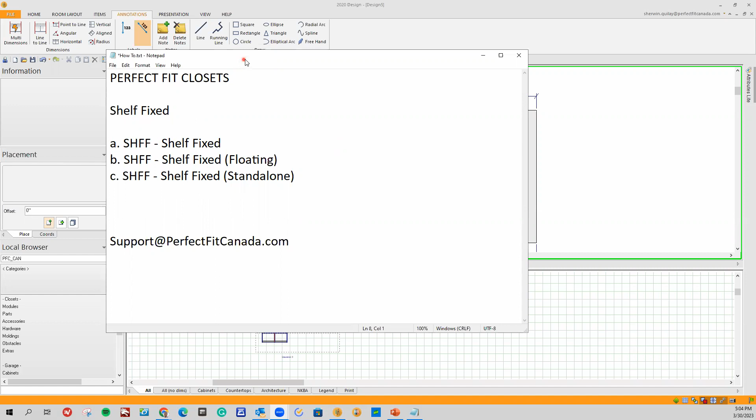I have my 2020 program up, and on the bottom left-hand side, I've got my Perfect Fit Canadian catalog. We also do have an American catalog that's indicated as PFC US.

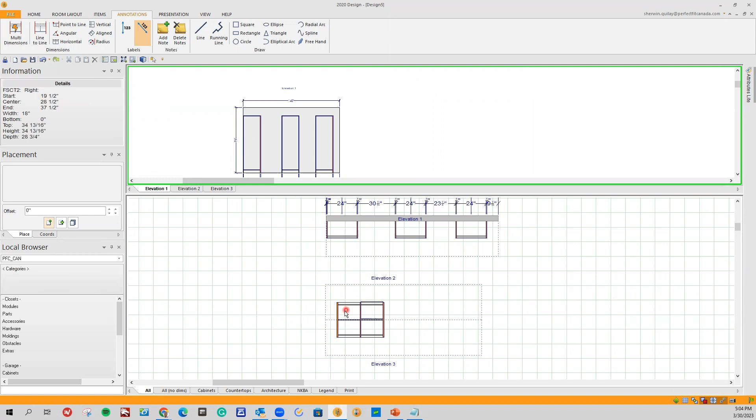My current design has 3 elevations. I've got an elevation with 3 wall modules. I've also got a fictitious wall, and I've got an island module, which we'll be talking about in just a moment. Let's just take a quick peek.

On our elevation 1, I have 3 wall modules, 3 tall modules. All of them are 24 inches wide. I'm going to go ahead and choose a couple of different areas and let you know from the basics all the way down to advanced.

I'm going to double click our categories, parts, and in our parts we've got 5 subsections: panels, shelves, drawers, doors, floating shelves, and parts below. In our subcategory shelves, I'm going to double click our shelves.

The first section has shelf fixed floating and shelf fixed standalone, similar to exactly what we're going to be talking about.

Everything in navy blue is a shelf fixed. Shelf fixed comes with 4 to 6 cam holes. At the very top of these shelves and the very bottom, we've got 4 holes pre-drilled, 2 on the left, 2 on the right. If it's greater than a certain depth, we'll add extra holes to add a total of 6.

For 14-inch deep sections, we've got 4 cams. So these are our fixed shelves, and these stay put. They don't move. Once you've locked them into place, they stay put.

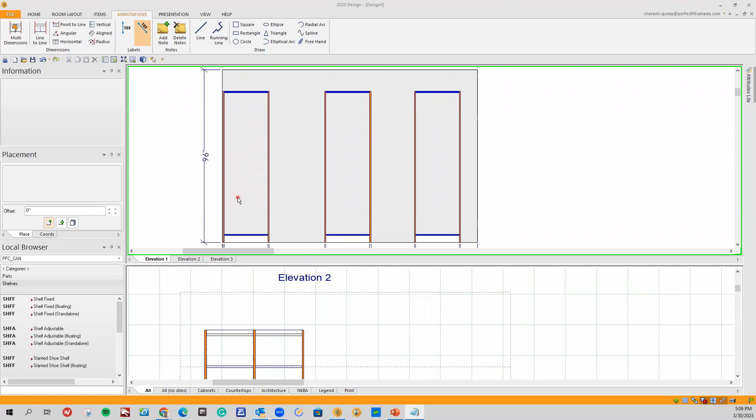For our tall module sections, because we've got long panels here, we want to add a 3rd fixed shelf. So all I'm going to do, since I've got modules in place, is left-click shelf fixed and drag it into the elevation. As soon as I see my magnet, I can let go.

I can let go at any time as long as I see my magnet. I'll drop it here as an example, and I can now move it to where it needs to go. We can go ahead and add the shelf fixed.

Typically you'd like to add it in the middle, but anywhere between the top mark or near the bottom mark will suffice. This will prevent the actual panels from bowing even further. If I put the shelf fixed in the middle, this can't really bow as well. If I add it anywhere here, I still have enough space to prevent the bowing from happening.

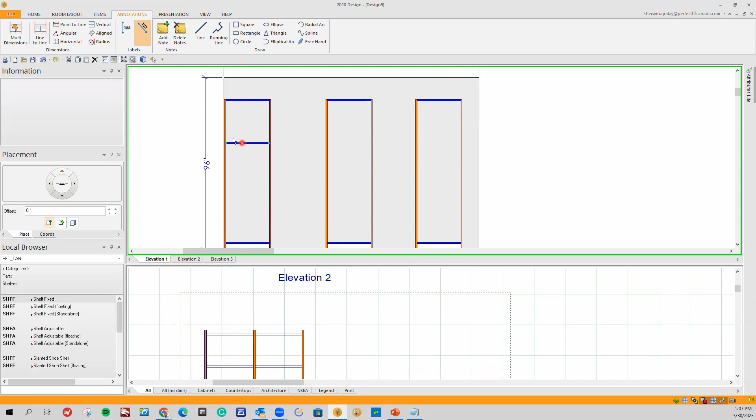So again, I can just grab a shelf fixed and drop it in, just like so. Now let's go ahead and delete these - that's pretty simple and basic. I like to use 3 fixed shelves per tall module when possible.

The 3 fixed shelves for tall modules. Now let's go ahead and delete these, and let's go ahead now and try our wall modules.

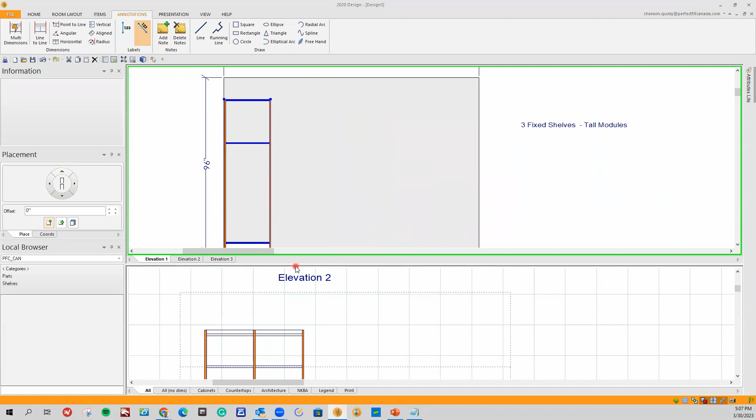So now I've got a blank space, and let's add in some wall modules. I'm going to go to my categories, modules, wall module, and drag and drop my wall module. Once I see my magnet, I'll let go of my mouse.

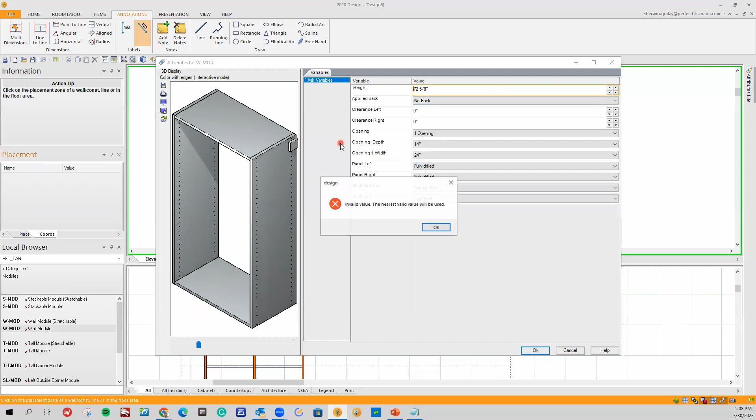A new dialog box will appear. I'll right click on the illustration. I'll keep this at 14 inches deep, keep it at 24 inches wide, and we'll have a bottom shelf. For the height, let's change it to 72 5/8. We'll click on OK.

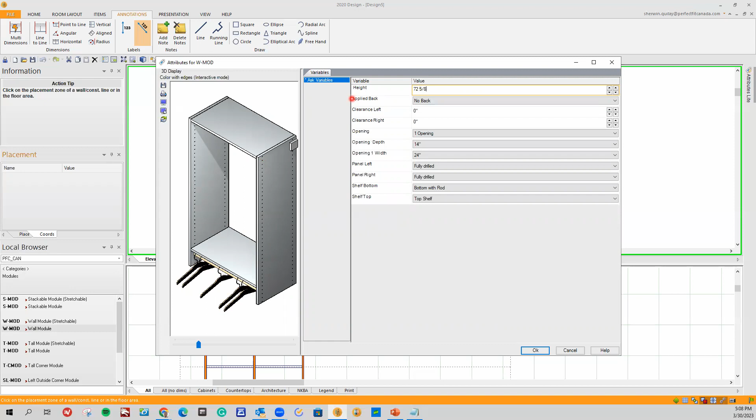And once I drop it in, I'll add one more wall module. But this time, I'm going to keep it at 72 5/8, keep it at 14 inches deep, 24 inches wide, and this time we'll have no bottom shelf. Click on OK. And these are all fully drilled wall modules.

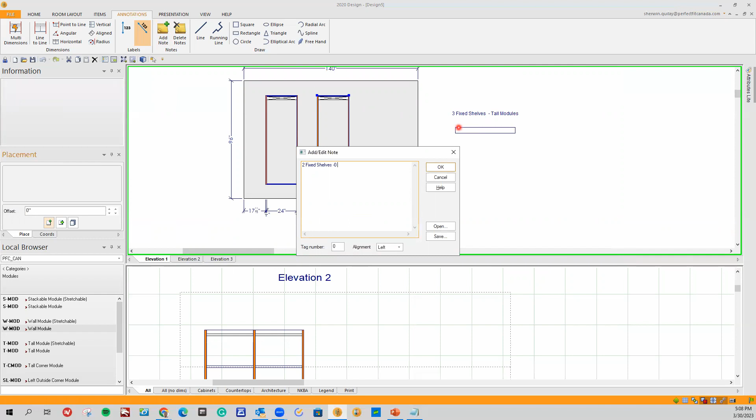For wall modules, I like to have a minimum of 2 fixed points, so we need 2 fixed shelves for wall modules. For this section here, I have 2 fixed points. We've added this one when we dragged and dropped our wall module, but here we've subtracted the bottom shelf.

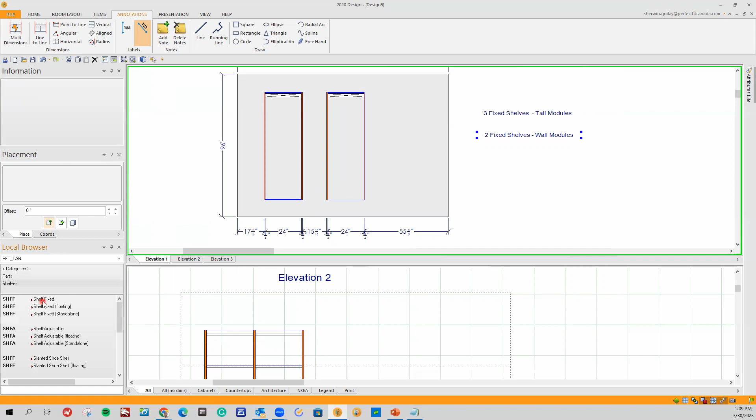So we can certainly go down to categories, parts, shelves, and add another fixed shelf and drop it in at the very bottom. So there's always more than one way to create these designs in 2020, and that's why we love about this program. I can certainly add another one if I needed some more security. Maybe it's a longer panel. And if it's certainly 83 and 15/16, I certainly like to add 3 fixed points. There's nothing wrong adding more fixed shelves than less.

What's really great is if I've got 2 modules in place, either 2 wall modules or 2 tall modules, I can certainly bridge them together using fixed shelves. So let's use a couple examples. So if I drag this all the way to the left, we'll drag this closer this way here, and let's add 2 more tall modules after.

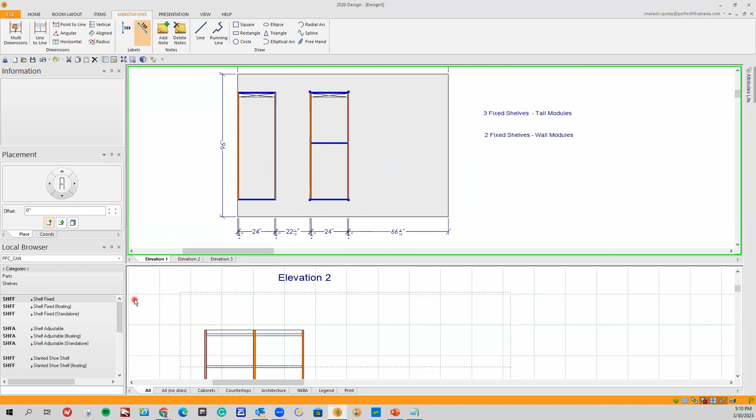So now that we know that we can place these fixed shelves, what's great about using these wall modules is that regardless of the size of the wall module, my parts will resize according to the module width. Therefore, I don't have to give it a specific dimension. Even if I increase this wall module, I've got 2 fixed shelves in their place, I can click on my attributes, and I can resize this module, and the parts will resize accordingly.

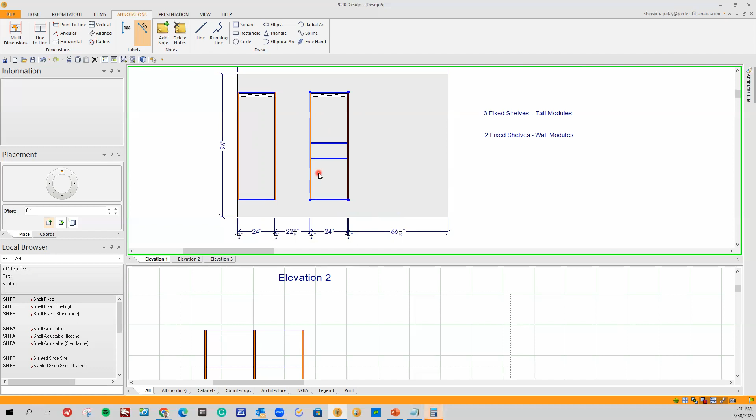I can right-click the illustration, and let's change this module width from 24 to 30 inches. We'll click on OK, and you can see the 2 extra fixed shelves that I placed have now resized, which is fantastic. All these are fully drilled. So what I could also do with my fixed shelves, because I've got fully drilled panels on each of the modules, is I can drag and drop a shelf fixed, and I can combine them together, like so.

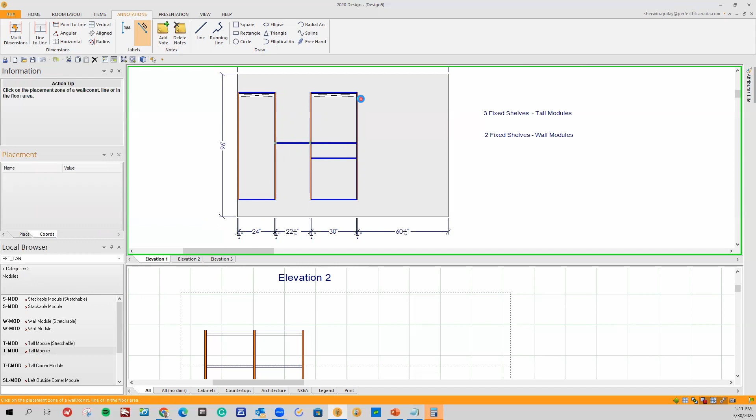Let's try this again with our tall modules. So we'll click on our modules, grab a tall module. I see my magnet to my farthest working left, let go. And let's make this one 24 inches wide. And let's make one more section, and I'll make this one just 12 inches wide. Click on OK. Everything's all fully drilled.

And let's just say that I want this 18 inches to the right wall. Again, I'd go ahead to my categories, parts, shelves, shelf fixed, drag and drop it in like so. What's also really cool, because these are fully drilled panels, is now I can actually use shelves to combine the two. So it's very similar to a wall module.

And now all I've got to do for my parts is go into my toe kick, connect to fixed shelf, drag and drop it in here. And now I've got 3 modules. So I've used one module here, a second module here, and then in the middle, I've just used parts. So this works just as well.

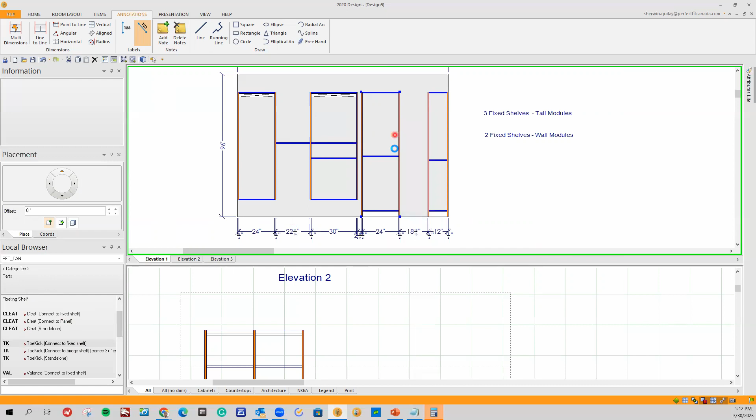So here's another scenario. I'm going to go ahead and delete these in the middle here, and I'd like to talk about fixed shelves floating. I'm going to go ahead and change the attributes for this particular module. On the right-hand side, instead of having it fully drilled, I'm going to have this half drilled. Let's say we want to bridge them together.

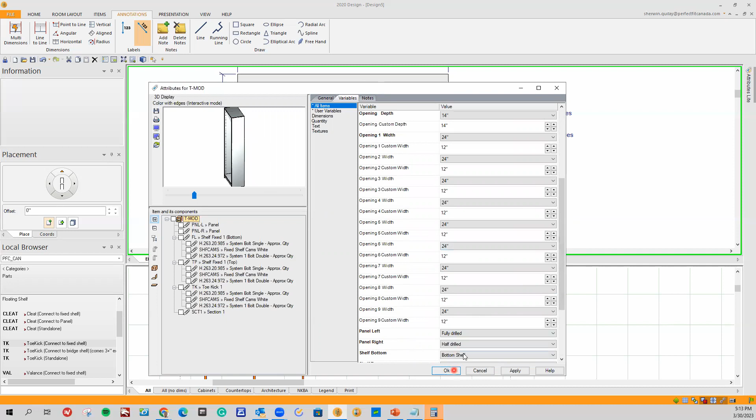So I'm going to go to my panel on the right. We're going to make this one half drilled, so now I've got a clean face on the right side. We'll click on OK, and now I'm going to click on this module here. Oops, made a mistake, there we go. Now I'm going to right click on this module, left click on attributes, and I'm going to change the panel on the left to half drilled. Left click on my variables, scroll down to panel left, fully drilled, we'll change it to half drilled. Click on OK.

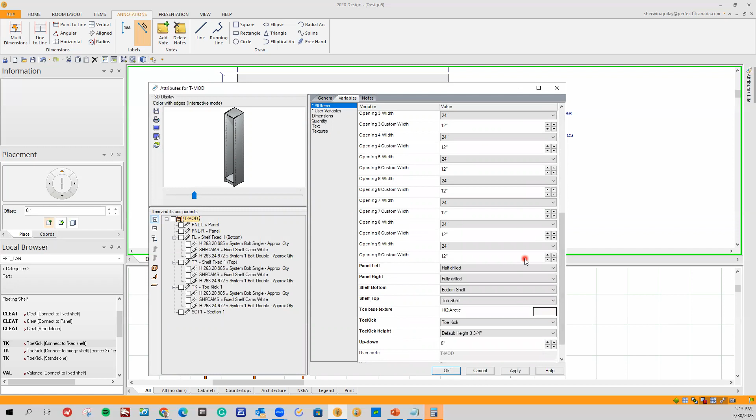Let's illustrate this for everyone. This is panel half drilled, and we need another panel half drilled. So I've got a panel half drilled here, and a panel half drilled here. So I got a clean face on this side.

Now, if I go back into parts, shelves, shelf fixed, drag and drop, I can put it into these modules, no problem. But as you can see, I can't join them together, not like last time. Last time I had the panels fully drilled, so I could actually put a fixed shelf in between the two, but now I can't. So this leads us to our next section called shelf fix floating.

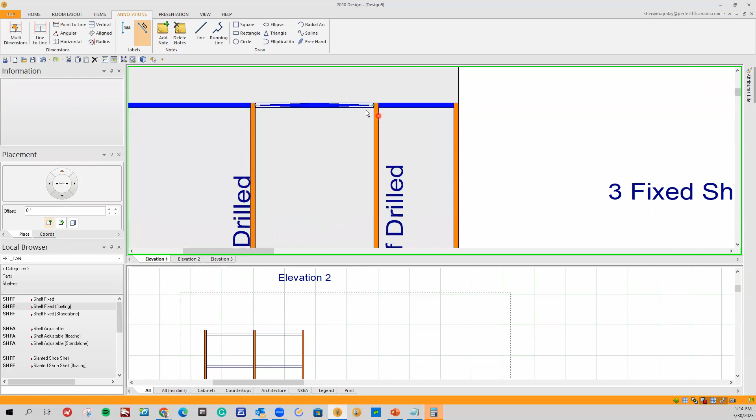To use shelf fix floating, I can drag and drop and combine them together. This has the exact same properties. You can see that it's navy blue still, but it's got white sections. Shelf fix floating is exactly the same as a regular shelf fixed, except now we don't have to abide by the properties of having fully drilled panels.

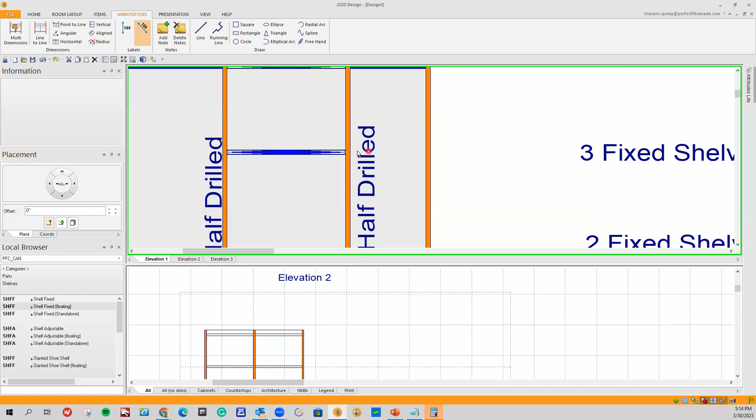All the installer will have to do is drill from this section where the hole is, pilot drill through, and now we've created holes so we can combine the two, and now we've got clean faces all the way down. Perhaps you want to put a vacuum in here and you don't want to have any more holes shown, and that's a great opportunity to use shelf fixed floating.

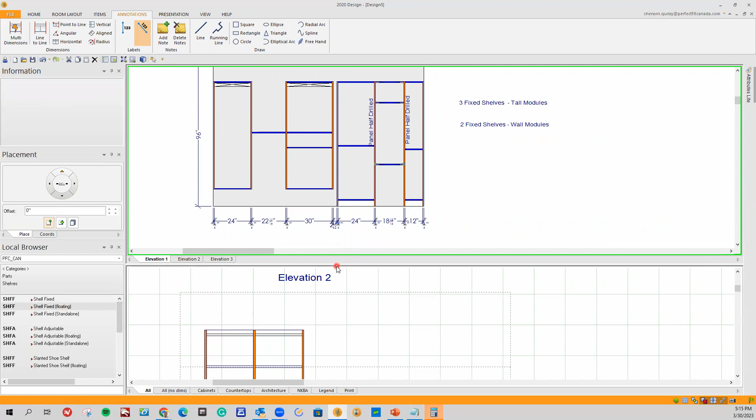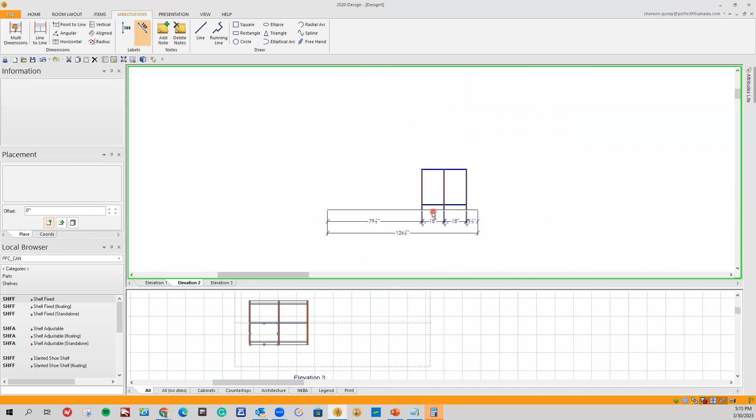Another thing that you can do is on our islands. So elevation 2 and elevation 3, I have an island. This is using the island module. On our island module, we can use a shelf fixed, drop it in. And sometimes, if I go back to elevation 2, going back and forth between the two, if I drag and drop, let's see if it works, and it stays in place.

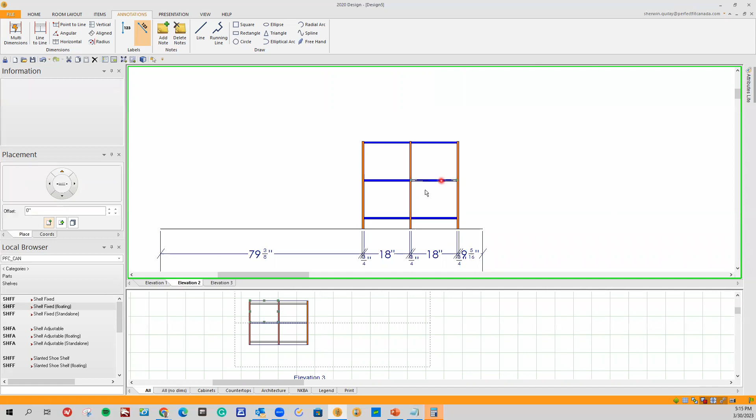But sometimes it doesn't fall in place, so I can also use shelf fix floating, and that also works as well. If the shelf fix goes back and forth between the front and back of the island module, always use a fixed shelf floating whenever possible, and that will help you design it using the exact same properties and placing it in the proper positions accordingly.

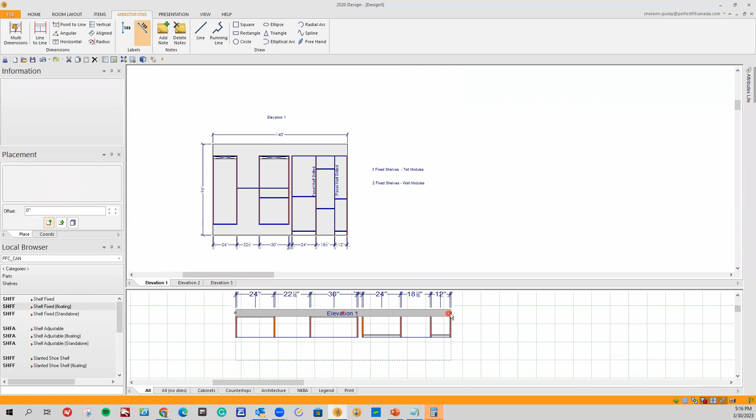Shelf fix standalone. So let's extend this wall here ever so slightly. Now let's just say that you needed a random part for whatever the case is. Maybe the installer wants to actually combine 90-degree shelves. Maybe they want to combine adjacent walls together. Whatever the purpose is, if you just wanted a shelf fixed, you can use shelf fixed standalone.

Maybe you want to order an extra part. Maybe you damaged a part by accident and you just need an extra fixed shelf. You can always grab a fixed shelf standalone. Anything that says standalone in our catalog means it's just a part. So there's my shelf fix standalone. I can left click once to drop it, and then I can resize it. I can actually go right back into it.

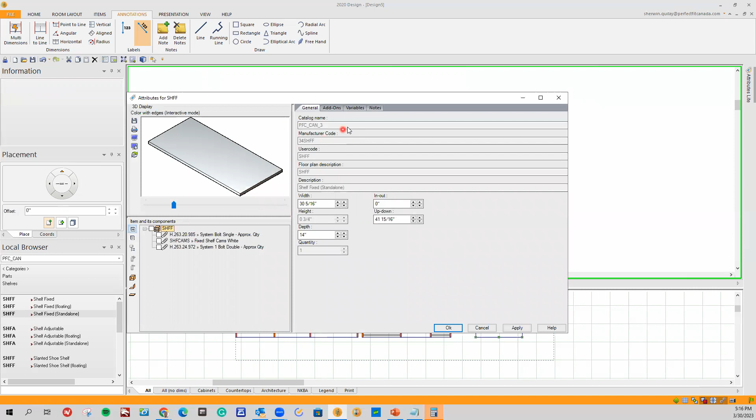I can right click my shelf fix standalone, left click on attributes, and this is where I would go to actually resize it. I would go to my variables, and now I can give it my depth as well as my width, whatever width I need it to be. I have a random part. Click on OK. And now I have it dropped in there.

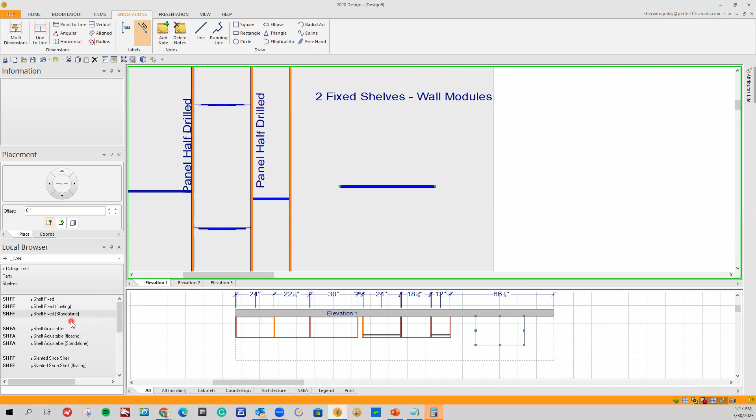So those are three ways that you can use a shelf fixed: regular inside a regular module, shelf fixed floating when I want to combine the two and I have no line boring holes or use island modules, and shelf fixed standalone when I just want to buy parts or grab parts for whatever the case is.

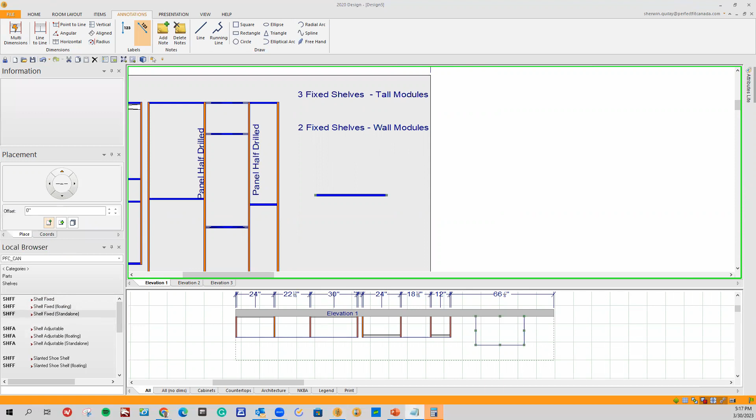This concludes our shelf fix portion, shelf fix floating, and shelf fix standalone.